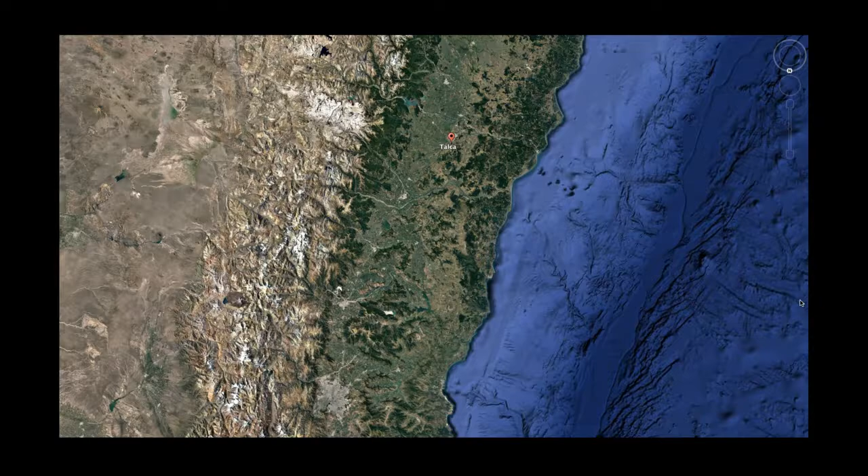Next image. This is the Maule River near Talca city. You can see the Colbún Lake, which is not really a lake, it's hydroelectrical generation. In the upper side of the image you can see the Maule Lagoon, which is the main lagoon in this region, near the frontier with Argentina. And on the right side of the image, the Maule River reaches the sea, where there is a very little, teeny city called Constitución.

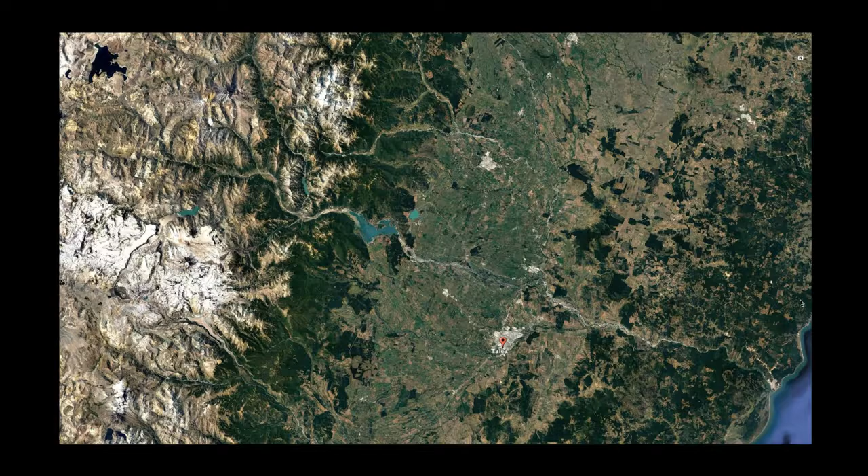And what we see now is a lot of works coming from this huge region with landscapes.

The School of Architecture is based on this territory and on this idea of how to make, how to do. And how to do, coming from this territory, means the idea of making with the material that exists now in this territory.

And there are a lot of different possibilities to make something. If you take the idea of architecture, the architectural work is not only an abstract work. You can start from the other side of the idea of architecture: architecture is a material thing.

And what happens with the material is about how to make and how to do. This reminds me of a philosophical discussion that we don't have time enough to go into here, but this difference between how to make or how to do reminds me of a moral point of view. And for me, the main thing is to try to act, not only to make, but to act.

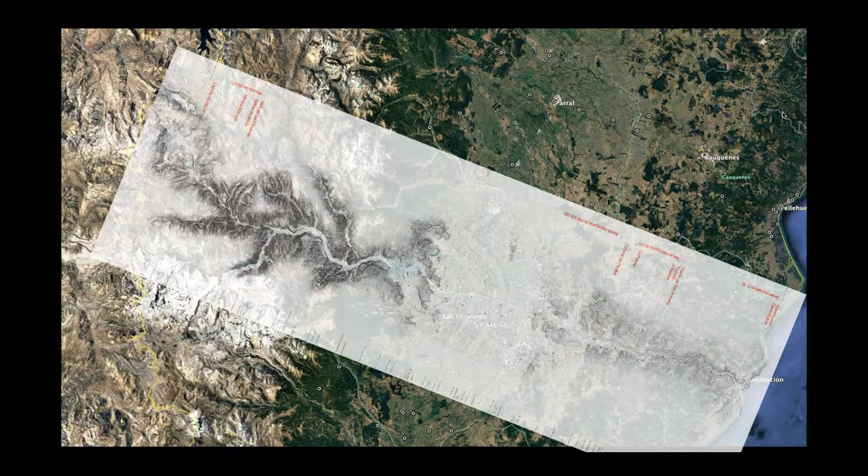This is the Maule River, and this is the space I'm trying to show you. We now have more than 700 tiny architecture pieces made in this territory, but I want to show only six of this approach, this investigation, these works.

In the Cordillera of Los Andes, we have this lagoon, Maule Lagoon, near the frontier of Argentina, and this is a place where one student made this nice representation of the people who fought to make this road between Argentina and Chile, to connect these two countries in this place.

And this territory is full of a lot of very huge industry of hydroelectric energy, and about that, a lot of infrastructure. But at the same time, a lot of people live in this place for hundreds of years.

And these two different kinds of landscape you can see in these places, but a lot of times this tiny intervention coming from the cowboys disappears in the landscape, you know.

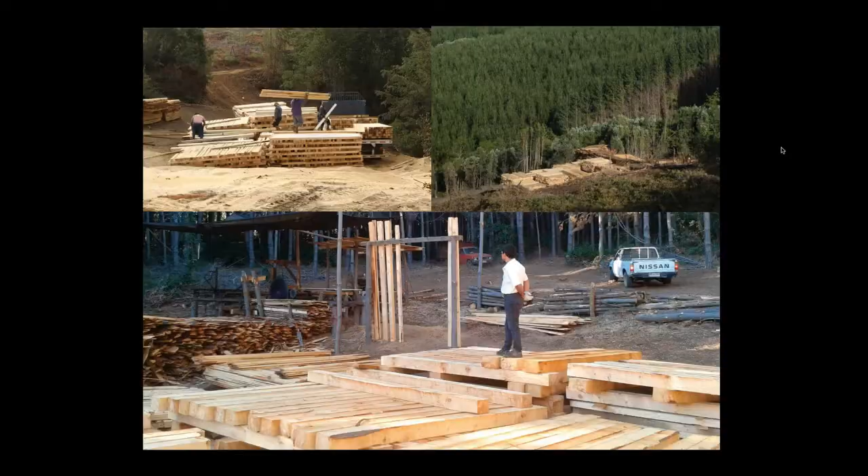And in this territory, Edgar Torres built this refuge for the cowboys that you saw here. Corral Abierto is the name of this tiny project. His father lives in the Cordillera de la Costa and works with wood, and they have a lot of pieces of wood, as you saw. And as I said in the first part of the presentation, the Maule region is a very huge region and very important in the production of wood materials.

He used this material because they have it locally, and designed and built with the cowboys in the Andes this refuge to transform the space, to get conversation, to make the place better to stay, because the cowboys have to spend the night here with the cows, since they go further up into the mountains. In summer this refuge works as a place to eat, cook, and sleep. It's possible to build because the cowboys have the knowledge to bring this kind of materials to this place, and the intelligence is to connect architectural intelligence to the intelligence of the place, the intelligence coming from the people who live there.

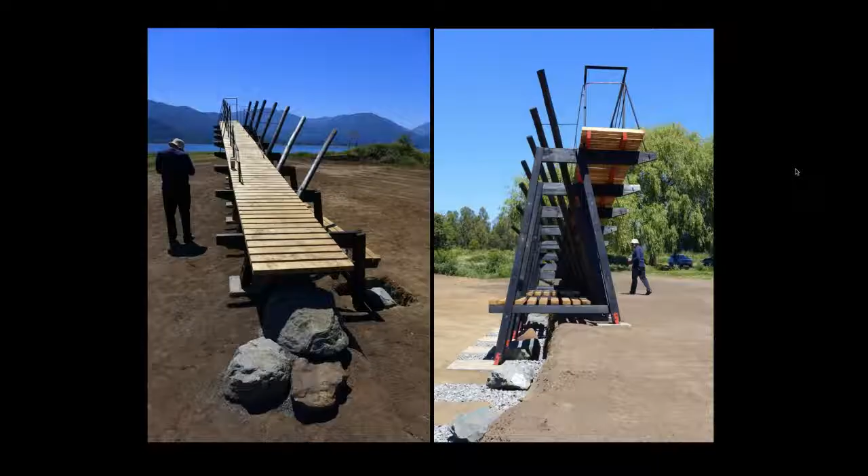But in winter, when the water sometimes goes up, people go and use this place like a little infrastructure. This is the main structure, a kind of tiny infrastructure built in wood coming from the surroundings.

You can see the water goes down in summer, and what people want is to use this huge space to go with their families and use this place like a beach.

Now, going to the valley, the Central Valley of Chile, not 100% but 80% of the wine of Chile comes from this Central Valley. We always have this kind of conflict between the surroundings of the infrastructure and the main themes of the rural areas, and this crash between the rural and the 21st century electric infrastructure is, for me, very interesting.

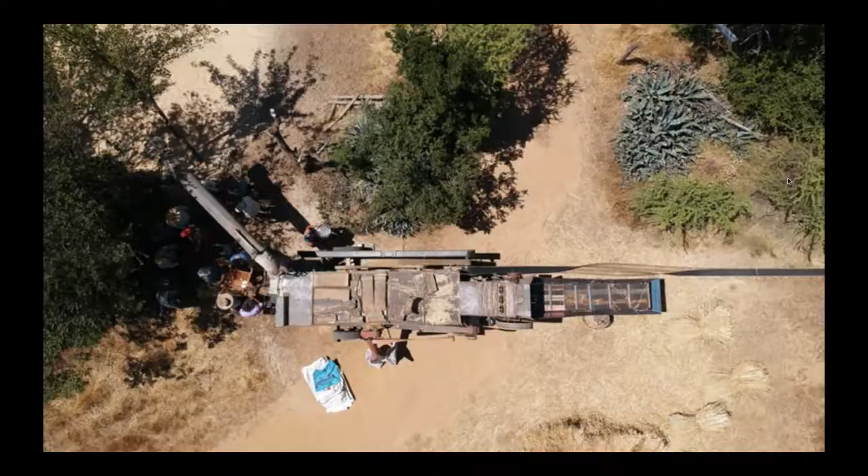And obviously photography has a very important place here, because you have to recover these ideas from the territory.

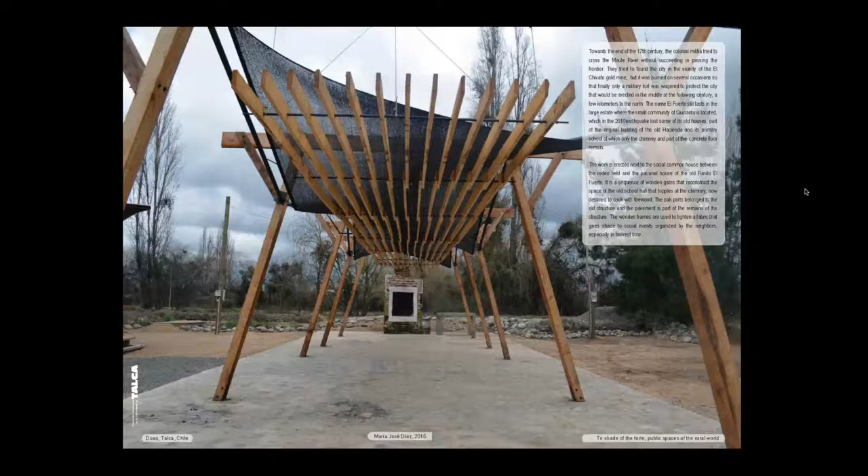This is the main... I don't know how to say it, the ancient Inca mine in the Maule River, the most southern mine from the Incas, here in the Maule. And in these surroundings, Maria Jose builds a shelter for the people who live there.

What you see is a shelter, buildings built in wood, and this wood coming from the rest of the school, which fell down in the 2010 earthquake. Only what we have in this place is the chimney, the soil, the ground, the concrete ground of the school, and some pieces of wood coming from the roof of the school. We rebuilt this as one big space to reconnect the people to this historical place, since this is the ancient school, and transform it with this project into a social place.

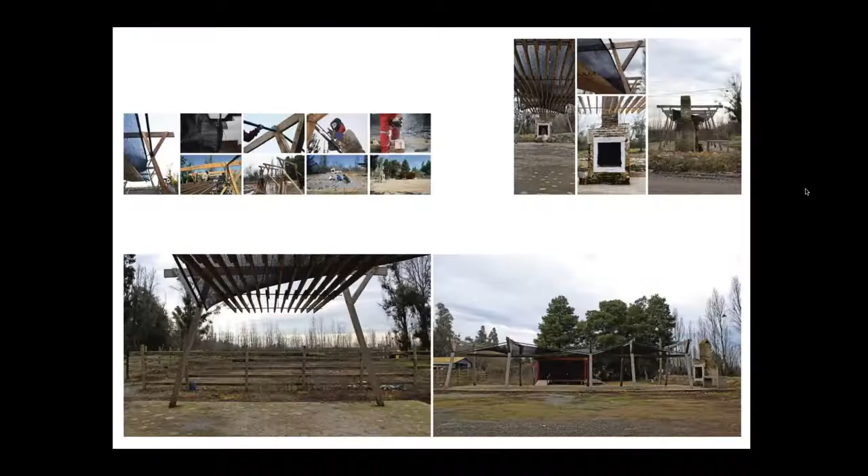This is the place. Okay, I don't know what happened. What happened with this? I'm sorry.

This is what Maria Jose built with people from this place. They recovered the ground, the concrete ground, and the chimney of the place, and transformed the chimney into an oven to cook, using the old wood coming from the roof of the ancient school in a new structure to build this shelter.

Guillermo Rojas works in the ancient Inca minery, which was used most recently between the 70s and 80s, for example. You have all this rest of concrete infrastructure, and they built this place to take a look at how the palimpsesto was, because you have all these different layers put one over the other. This was built with the municipality to recover this place, especially for scholar activities.

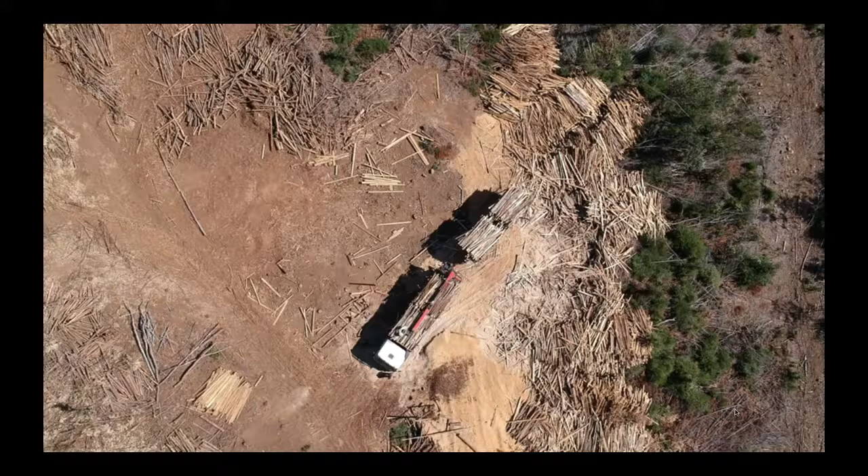Well, this is the main industry in this place, and it destroys very quickly and changes a lot of the surroundings. You can see only a little part of the species from the place, and all this work happens across this huge territory.

Again, the people from the place generate a lot of these images coming from this intelligence, using for example the vegetables as materials of construction.

This is what's happening now in some of these places. Sometimes the money that comes from the state doesn't work very well, because the rich don't always produce a good image. This place is Santa Olga, destroyed by the very high incendio.

I don't know how to say it, well, I don't remember. 100% of the houses were destroyed, and in this way we lost absolutely the culture of the place, changing it with these tiny social houses, because this is the main way the state understands and makes architecture.

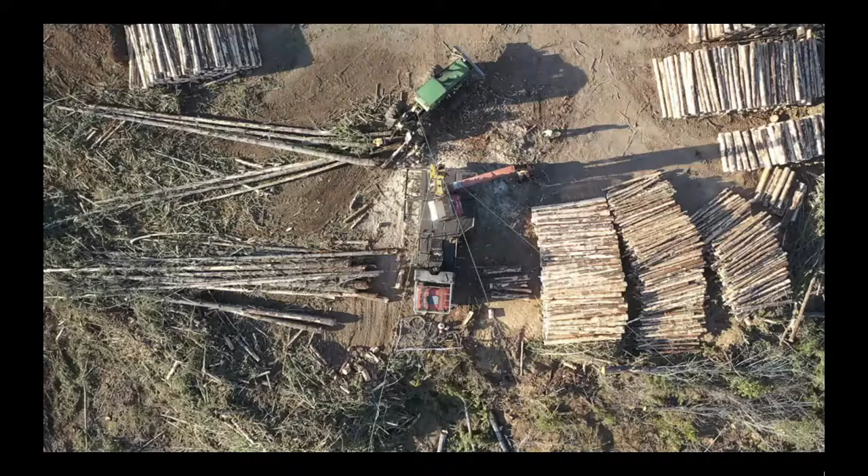I don't have any problem with this - I know this transformation is about history and happens all the time. But what happens when these things change is, for me, an opportunity to try to understand how to re-understand the territory and how to make architecture in these places.

Because this kind of industry, for example the wood industry, makes this kind of images, and from these images you can try to recover from the territory new ideas for architecture - not only about how to live, it's not an anthropological point of view.

But as we know, the territory and nature in general now have this huge problem, and how to re-understand architecture, for me, comes from this approach of materiality.

This is another project, built for Javier Corvalán, with these old women who make this... how to say this, I'm sorry... this activity with their hands, with barro - I don't know how to say it, arcilla - and make all this.

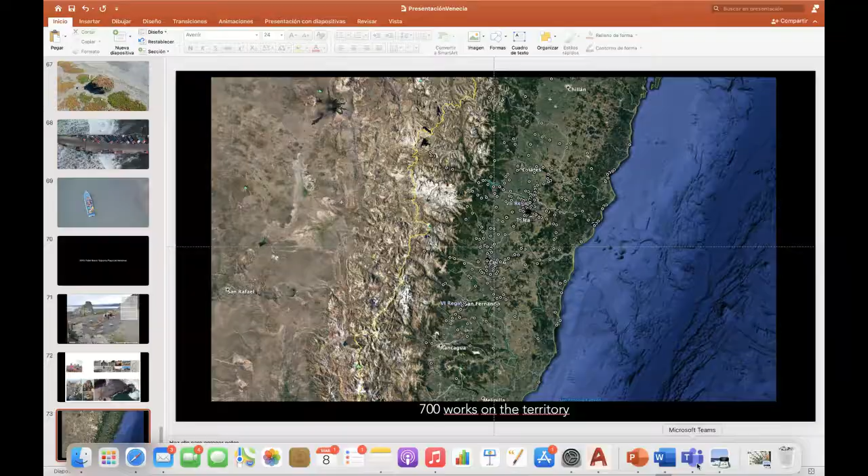I don't know if you want to talk first or see the second part of my presentation, about more teeny interventions inside the city and inside the houses of my students. Fernanda? Hello, I'm here. Yes, I think it's important to see also the second presentation. Unfortunately, Javier cannot speak in this moment. He asked me to be with you, together with you, to communicate with you. And so I think we can continue because I see we have our public here. Okay, thank you very much.

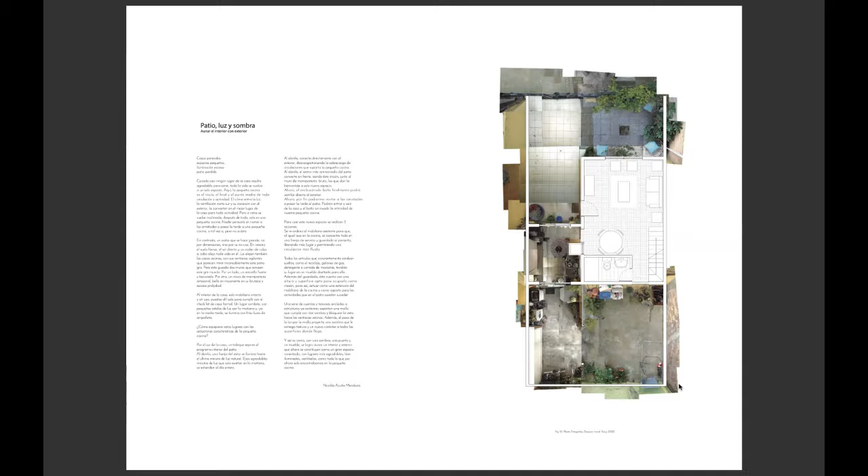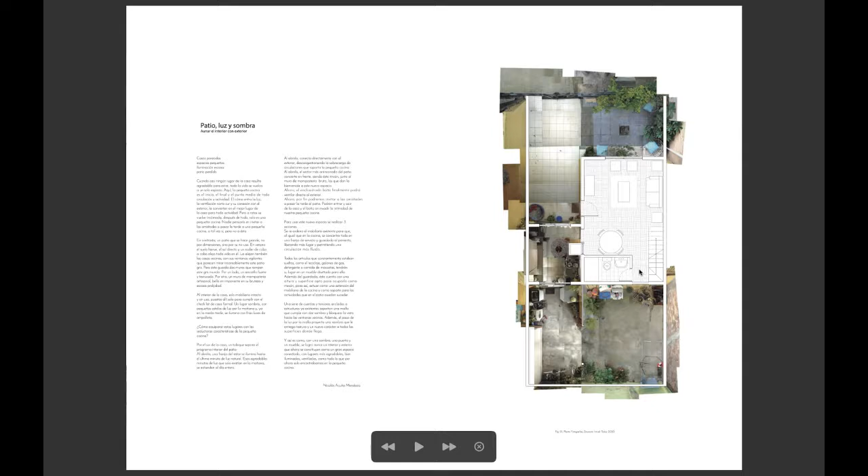I want to show you very quickly some intervention that my student made in his own house. This student tried to re-understand how to use his patio outside his house, and tried to make another relation between interior and exterior, making this door in between, this new door. This is the situation, and they move a piece of the wall here and go to the outside from this point, transforming this relation, especially for light.

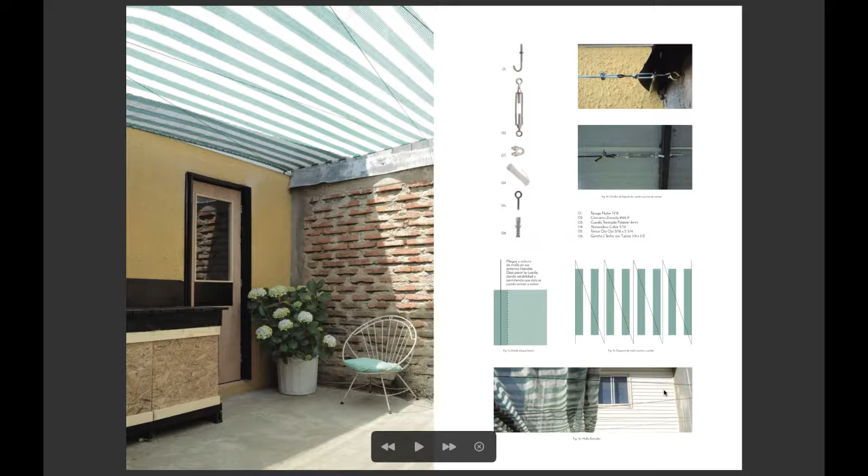First of all, to make a better place inside, but after that you can see this furniture outside of the place here, like part of the furniture of the main house. And after that they recover this brick wall here and different things. And how you see, it's very easy and very cheap, all the intervention with the materials that they have in his house.

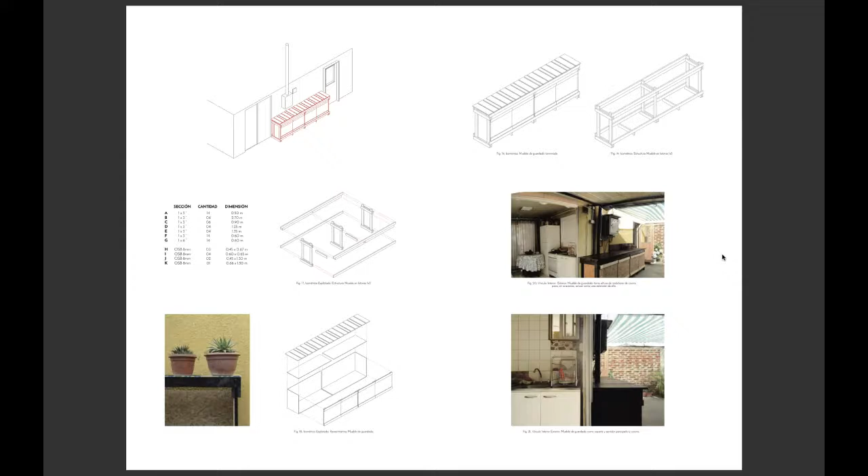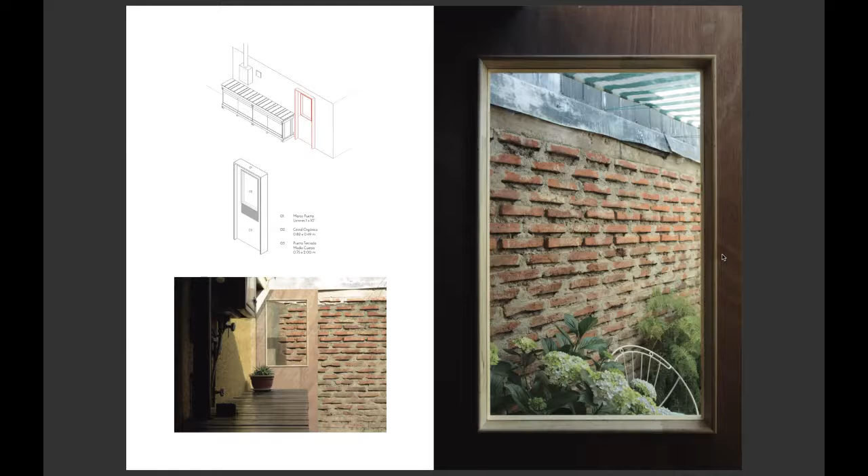And this is the result of this intervention. First, they have to make a lot of investigation about how to make this without money, because we have to make this with the materials that they have in his house.

This is a second one, another student. We made this path, this route between his house and the place that I used to work inside this huge patio, inside his space. They have a tiny storage room outside his main house, and they built this space to reorganize all these different parts of the patio, and to make this as a kind of public space inside his house, because the only way to make conversation, for example, with his friends, is outside of the house.

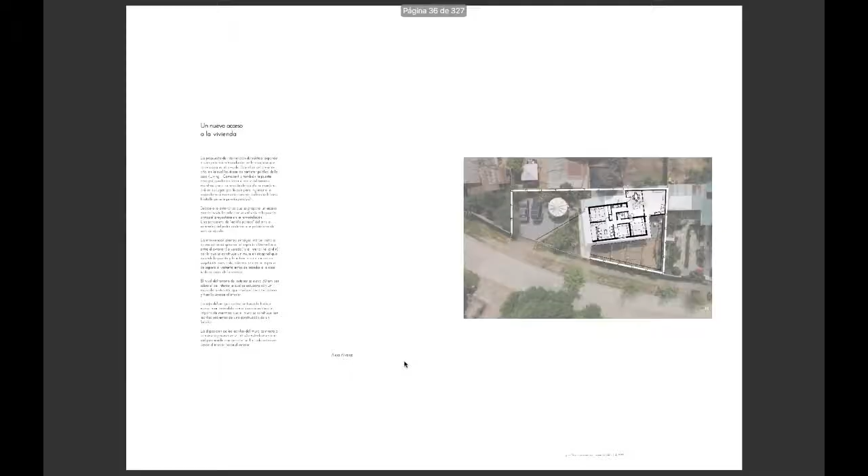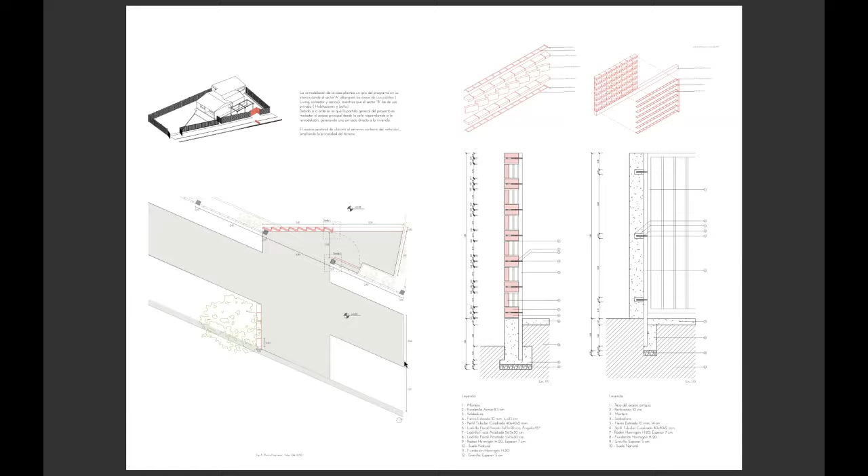This third one couldn't be finished because my student had COVID, and they made this investigation to this point but couldn't finish it. But I want to show you, because they have these bricks, and they designed a lot of different forms to make the new situation between the inside and the outside of this house, the main house where they live, but they couldn't finish because of COVID.

The threshold. This student lives in a very tiny house, and after time they grew, his house grew into new places, and obviously this kind of growing of the houses goes in a wrong way, because they don't have enough light, for example, or have to go inside a room to go inside the kitchen or something like this, some problems like this, and they redistributed the house, taking this part of the house and understanding how to use all the space in between.

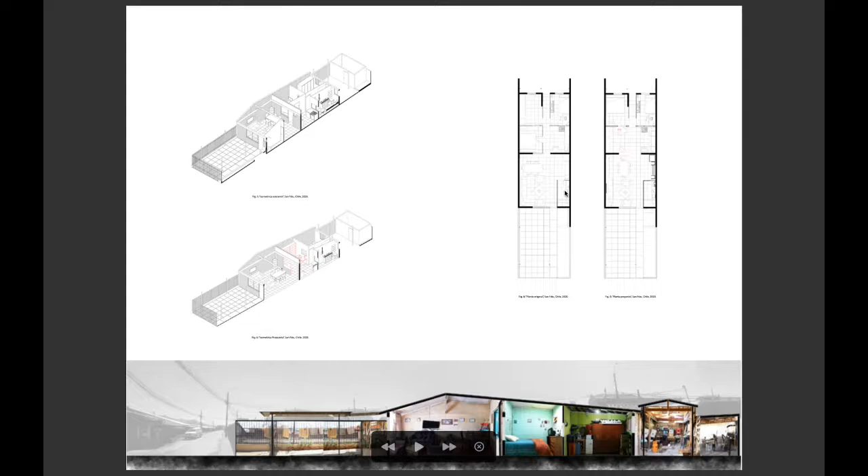You can see here the things that they took from the old house and made a new space to work and to reconnect the house, because they live here only with his mother. And this is the demolition of the main part of the wall between these two spaces. And this is the representation of what they have to do. They have to remove this part, and after that they move the other part of the wall from here and transform the main space into something like this.

With what they have in his house, I insist, is how to make. I insist on this idea of architecture as an act, and if you try to understand and think about architecture in this way, you can rethink the materials you have in your surroundings to make something, like in art, for example, Gordon Matta-Clark.

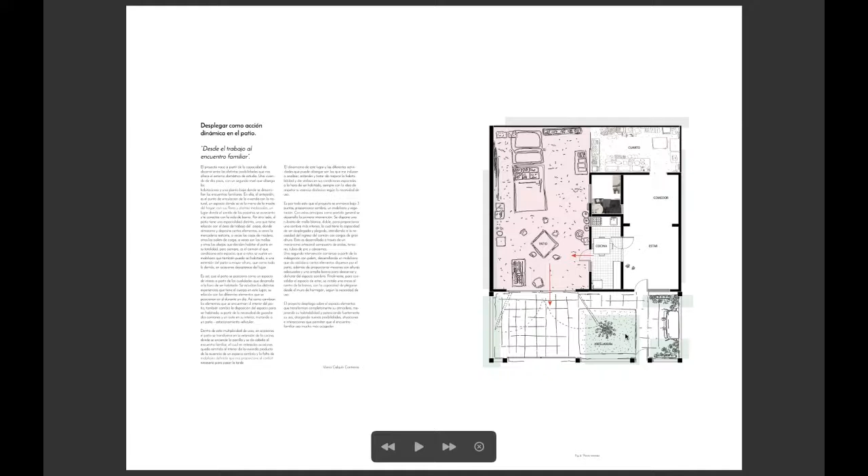This is another project, how to reuse this tiny patio, which is only concrete, we don't have a garden. This is the situation before we start, and we transform with this tiny and very cheap structure the place into two different uses, to make a place for the family and

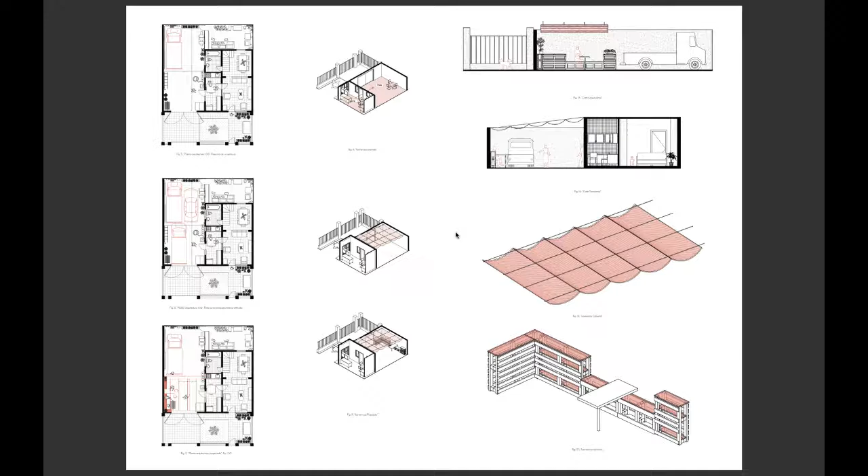garbage, the cars, and how to go with the family outside, because they don't have a garden. The only space outside is this, and because of COVID they have to move outside, because it's impossible to live in a very tiny house if you have, especially if you have all this space outside, and revalue the relation with this outside space.

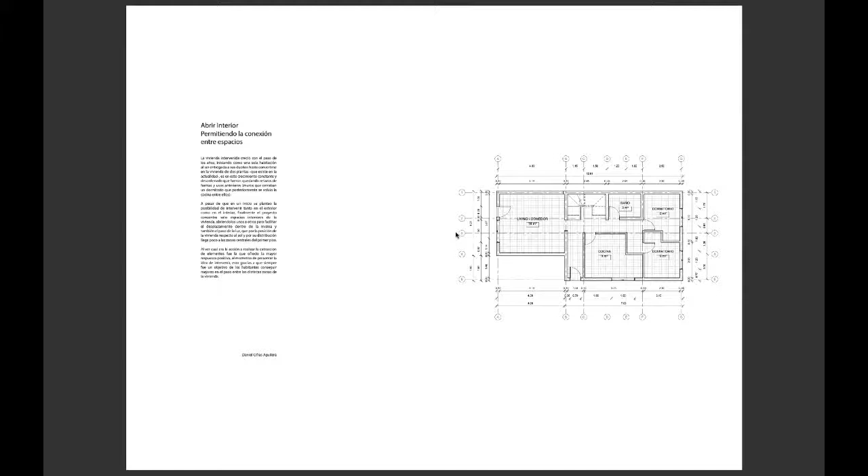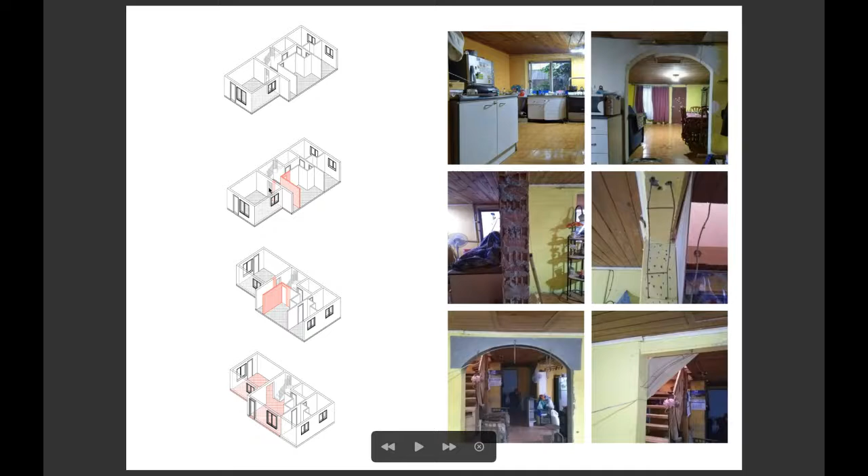This work is about removing some slice, if you think in that sense, inside the house, to reconstruct a new relation between spaces.

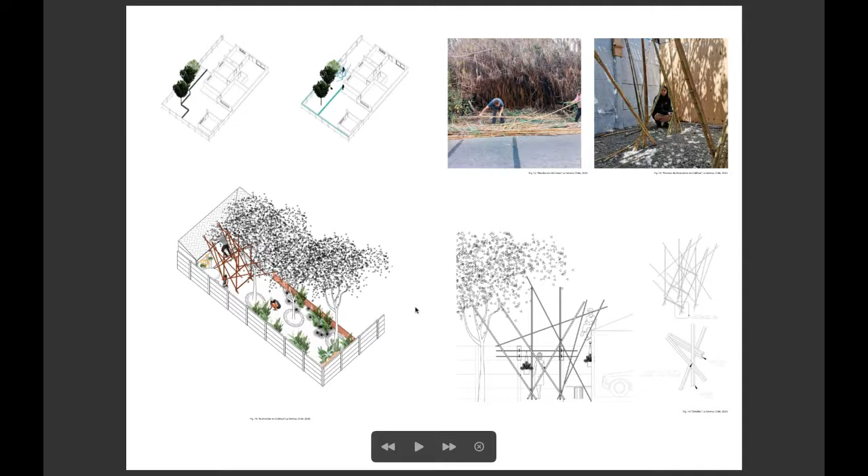And this other one is in the patio too, to try to understand how to make something outside and reconnect the relation between the interior and exterior of the house, using the materials that they have in the surroundings of his house, and making this furniture.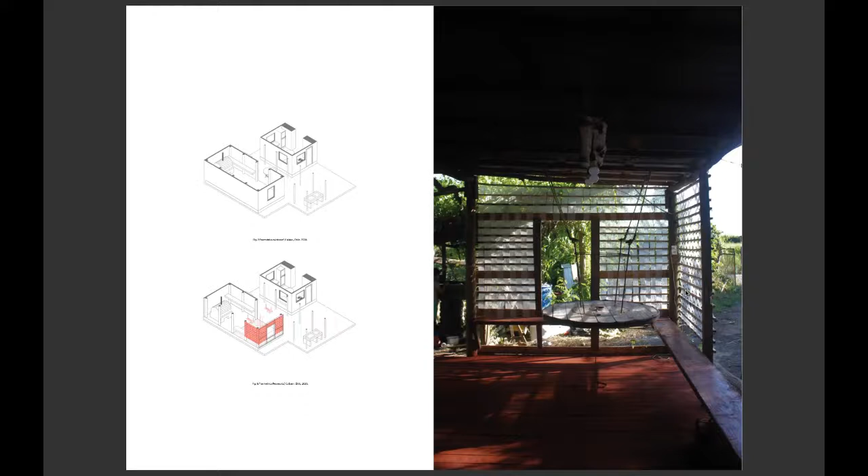And this is another project to recover a storage room, a garbage area, to now reconnect the outside spaces, because the house is very tiny, and they want to move a lot of uses to the outside because of COVID, and transform the garbage area into a flexible space to make a lot of things. And you can see this resolution of the problems with creativity, because they have some things and they can't buy new materials. And for me, this is an opportunity to be more intelligent and to understand how to make the things.

For me, this approach gives us an opportunity to make things, because sometimes we think it's so difficult to make architecture. With this approach, you can understand the architecture, the architect as a maker, and in this sense, the evaluation of how material is good for building something. You can build with anything, you know.

The question maybe is how to live with this kind of architecture, because this architecture comes from a school of architecture, and the students have time to make this. How to move from the professional way - I think Javier Corvalán and a lot of architects from Paraguay and South America, from Ecuador for example, have this approach to materiality, and this way to make things and revalue the intelligence which comes from the places.

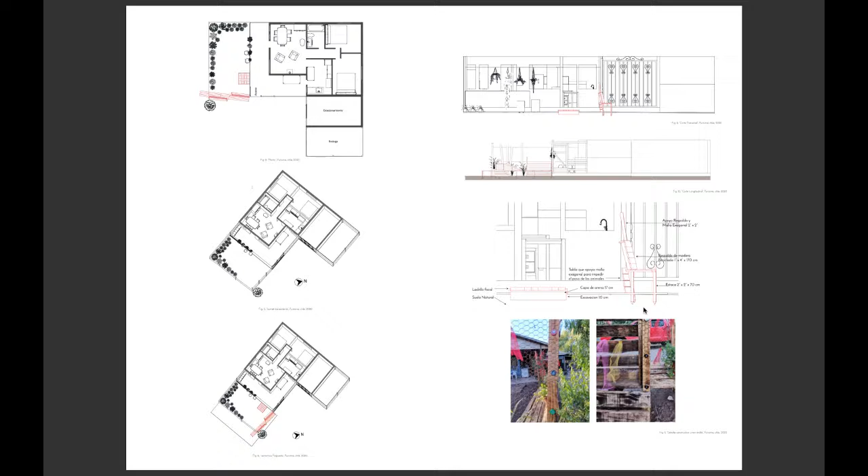This is another teeny patio outside the house of this woman, who is the grandmother of my student. They have to make a lot of teeny resolutions of different problems. Here the problem is that chickens go inside the house, so they moved the barrier surrounding the house further outside to make this patio for the grandmother, using the materials they have in the place.

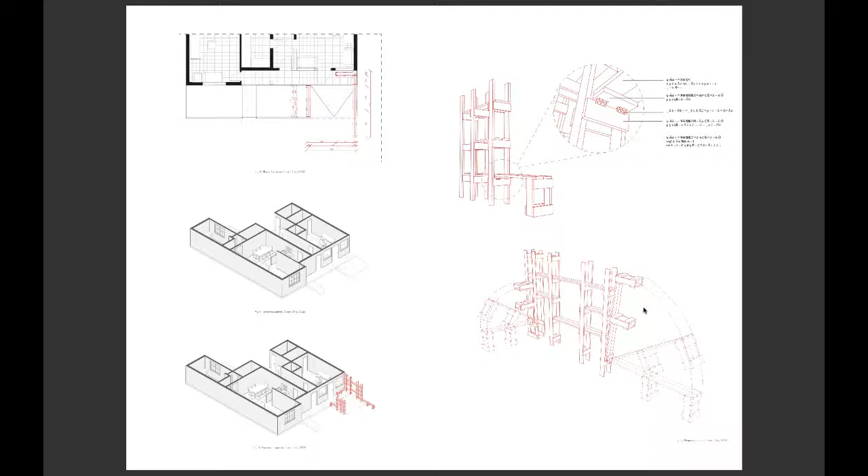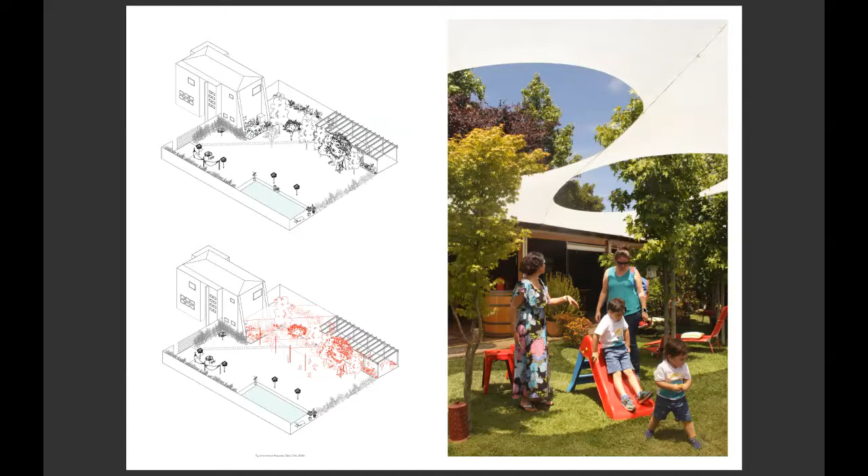I don't want to extend this a lot, because there are a lot of projects made in different ways, in different places, with different approaches, but always with this idea of reconnecting with the materials available in the surroundings, and how to make architecture in a very good way - sometimes without money, but always with creativity and a good way of life, and being kind to nature, etc. It's a way to transform the space we live in.

Making things in a better way, to reconnect the territory, the place, the people who live there, and sometimes this happens in a different way than the industry of architecture goes in these times.

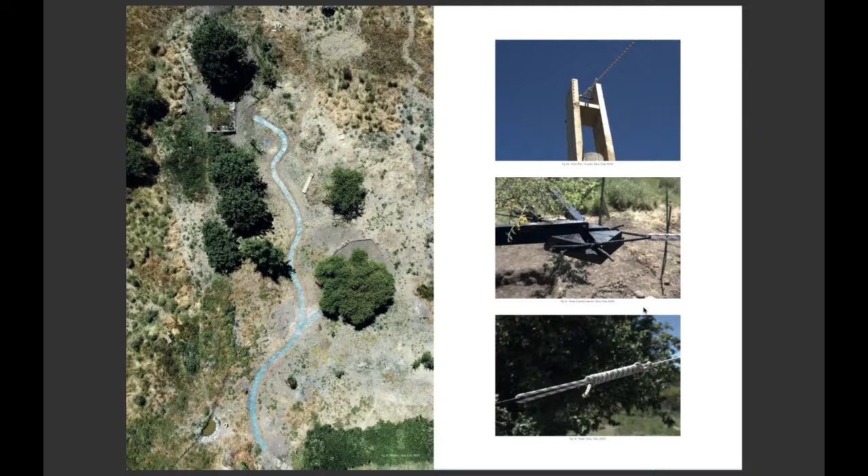Well, I think it's enough because there are a lot of teeny projects made in different ways, and what I think is very important is that every project is an investigation, and each student is different and thinks in a different way. What we try to do here in the School of Architecture in Talca is to make it possible with our students - not only one way to make, not only one way to do things, but to try to understand how to make his ideas and how to make it well.

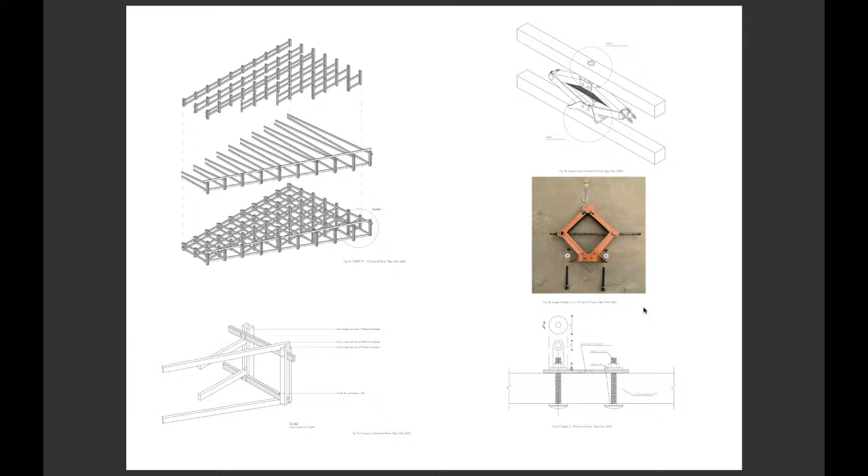Very quickly, this is very interesting because the patio is full of cars, because his father works with cars, and they try to keep a corner for the family in the place, including parts of these cars, to reconnect with his family in this corner of the patio.

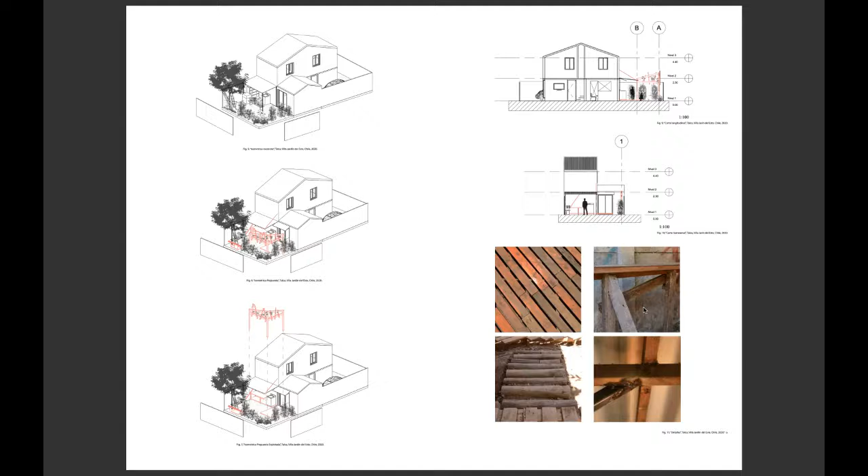This is a very teeny social house from the 70s, and they try to move a piece of landscape inside the house, in the patio, carrying a lot of plants, materials and colors from outside, because this place was countryside 40 or 50 years ago - another way to reconnect with the patio.

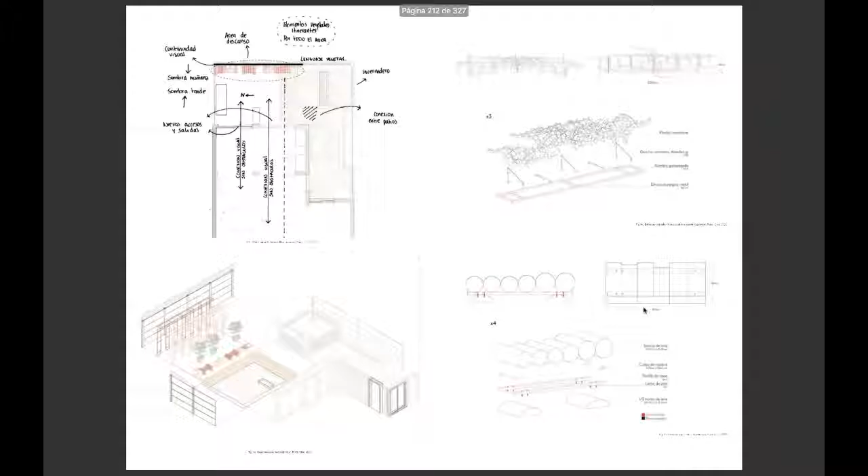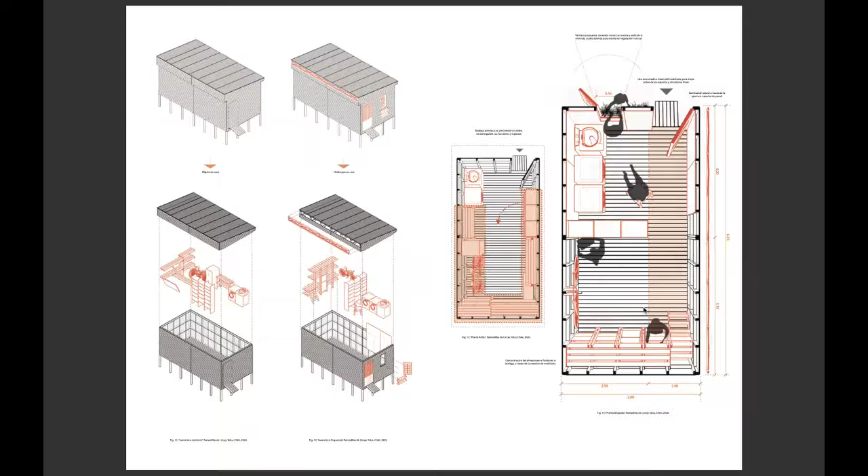Well, it's a lot because each student has to make it and build something, and that's why you can see a lot of different approaches to how to make it. Okay, well, thanks a lot, that's it.

Thank you very much, Germán. I don't know, wait a moment... Yes, problem. Hello, hi Joaquin. I don't know if another Joaquin - yes, we are two.